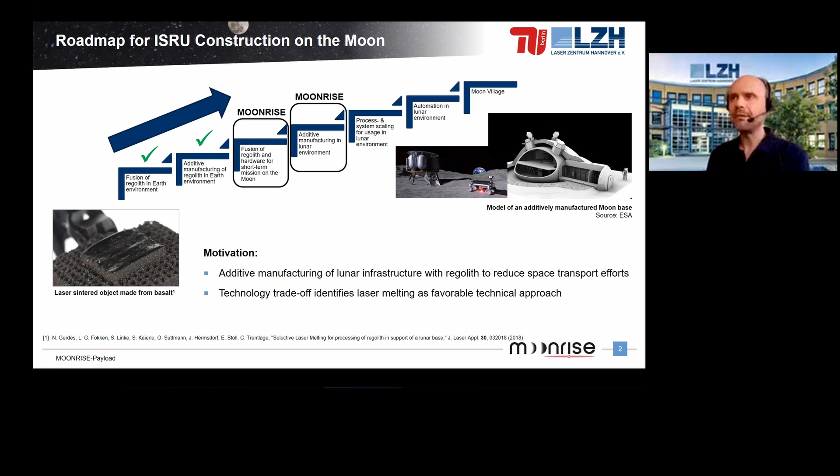We think laser melting is a good approach because it does not need any consumables like additional binders and so on. There's also no need of regolith pre-processing, so you can just use it from the ground. Laser melting is also quite mobile. It's independent from direct sun incidence, and you can achieve a good manufacturing precision with a laser. And what's important is a scalable process. You can use stronger lasers, and also automation is possible.

With our instrument idea, MOONRISE, we want to go for the lunar surface and make a small-scale proof-of-principle experiment to melt regolith with a laser: pearls, which means 0D objects, lines, which means 1D objects, and also areas, which means 2D objects. We want to collect process videos and photos of the fused regoliths on the moon and use this as an input for future process scaling along the roadmap I showed.

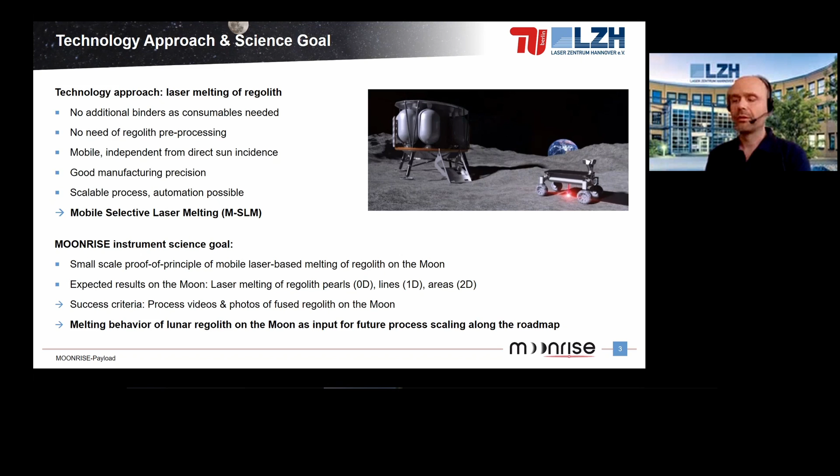So we teamed up, as I said, with the Technical University of Berlin. They have a strong expertise in regolith simulant development and processing. They also have a strong expertise in development of ISRU technologies and system design of robotic systems for construction. And we at LZH have a strong expertise in additive manufacturing. We do laser powder bed fusion, laser deposition welding, but we also use artificial intelligence for process control of additive manufacturing.

We also build laser spaceflight hardware. For example, we built the MoMA laser for the ExoMars mission. We delivered the flight model and the flight spare, and we did all the design in-house, the manufacturing, and the qualification of these lasers.

The Technical University of Berlin developed a regolith simulant system, which means we have Maria-based simulant and Highland simulant, and you can mix them to achieve the local specific mixture for a specific landing site. You can add olivine, ilmenite, and other minerals to chemically adapt the simulant, and also physically adapt the simulant by adding sintered particles and molten glass particles. So we can make the specific mixture according to the landing site.

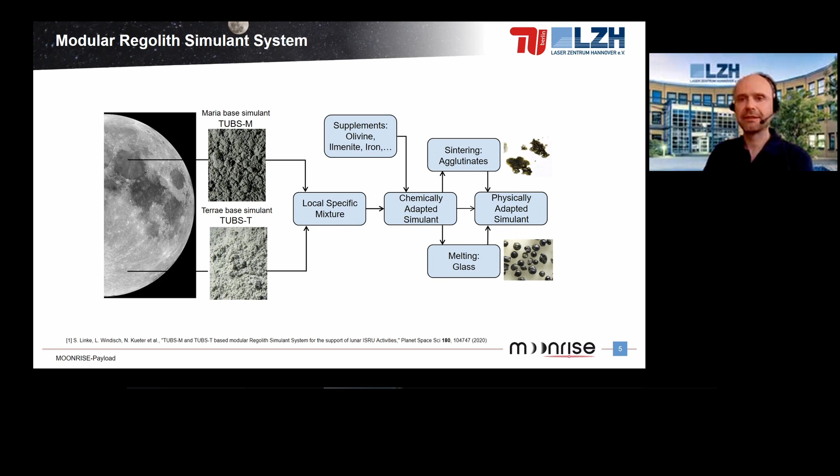The next step was testing the process feasibility of laser melting. We used 9 different simulants, lithic, chemically adapted, and also physically adapted simulants with particle sizes up to 2 millimeters, and we processed them in vacuum with a fixed spot to achieve these 0D pearls, which are seen on the right. The fusion starts in our configuration at 35 watts of optical power at a wavelength of 976 nanometers, and you only need less than 10 seconds to melt the regolith simulant.

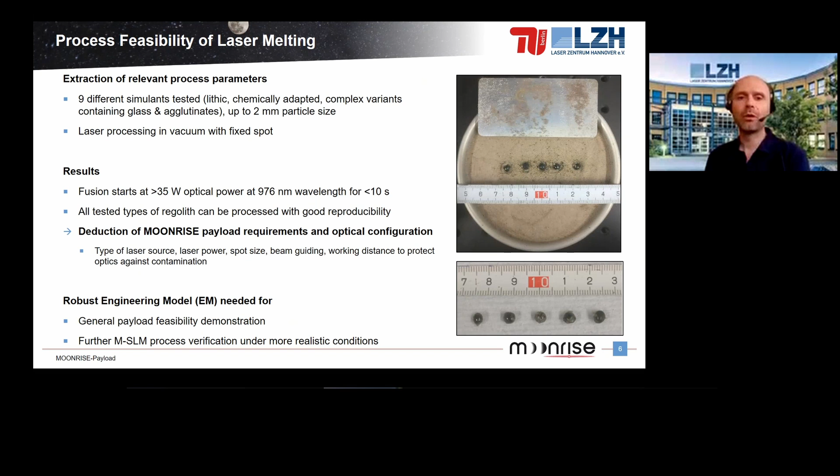All the different types of regolith simulant we had could be processed with good reproducibility with the laser. From this, we deduced the MOONRISE-payload requirements and the optical configuration: the type of laser source, the laser power, the spot size, beam guiding, and working distance to protect the optics against contamination. With this knowledge, we built a robust engineering model, on the one hand to show that such a payload is generally feasible, but also to further investigate this MSLM process under more realistic conditions.

Here you can see the MOONRISE engineering model. It consists of system communication, PCB, laser, including the laser driver, and the optics. Everything is packed in a hermetic housing to protect it from contamination. Typically we go for 70 watts of optical output power. We can go up to 140 watts. And as I said before, for the melting we need about 35 watts, so there should be enough margin.

The power consumption is about twice the optical power, but it's only needed for a few seconds to melt a pearl. The mass budget is 2.7 kilograms for the engineering model, but it could be further reduced for the flight model to below 2 kilograms. The dimensions are 1.5 CubeSat units, and we need a distance to the ground of about 23 centimeters. We already tested this engineering model for temperature and vibration.

We work with a fixed spot, and what we need is some mobility. So we have to mount it on a rover or on a robotic arm to also get 1D or 2D objects. And for the experiment verification, we need external cameras, which are usually available on a robotic arm or on a rover. Here you can see the testing of the model. We did the vibration testing.

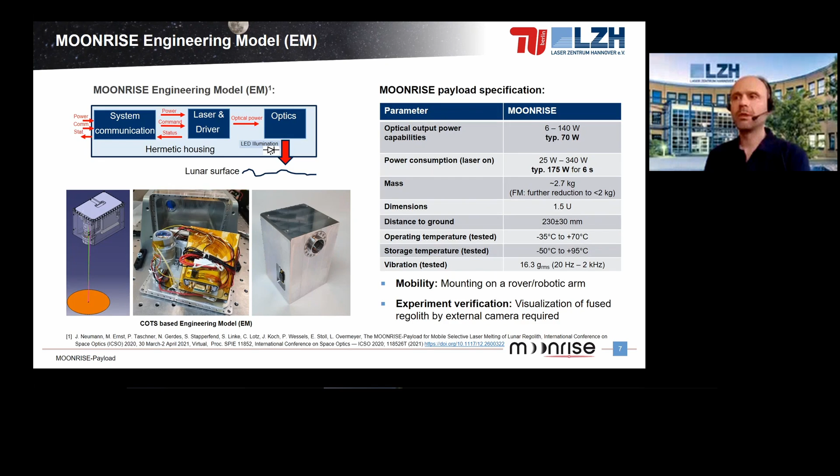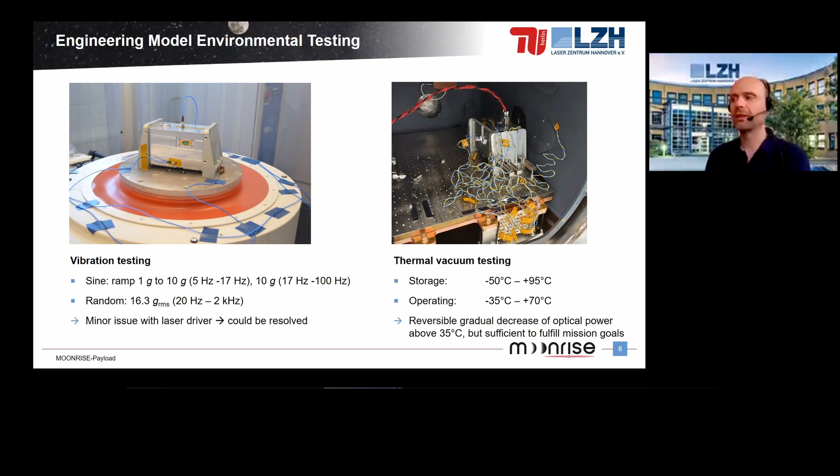There was a minor issue with the laser driver, which could be resolved, and also thermal vacuum testing. There was a reversible gradual decrease of optical power above 35 centigrade, but it was still sufficient to fulfill the mission goal. Then we went further to verify the process under different gravity conditions.

Here in Hanover, we have the so-called Einstein elevator, which is a driven drop tower. With this drop tower, you can also simulate lunar gravitation. We have 4 seconds trial time. We activated the laser for 3 seconds at 105 watts of optical power. We have a little bit shorter time than in the experiments before, therefore we had to go higher with the power, and 1 second to cool down the melt.

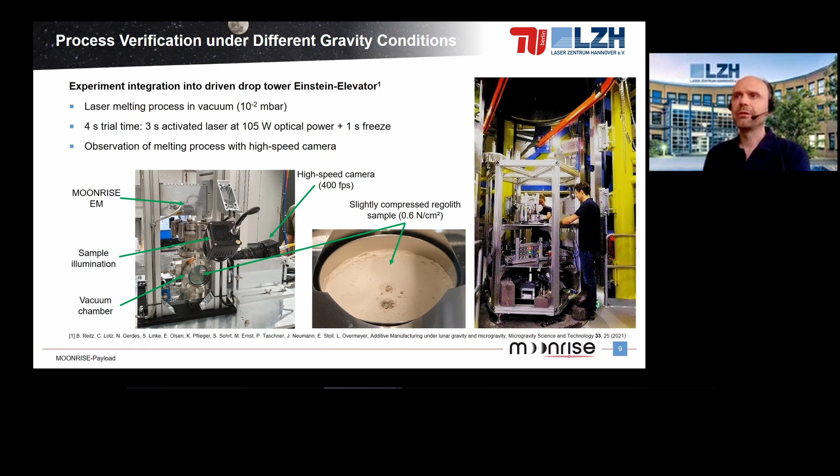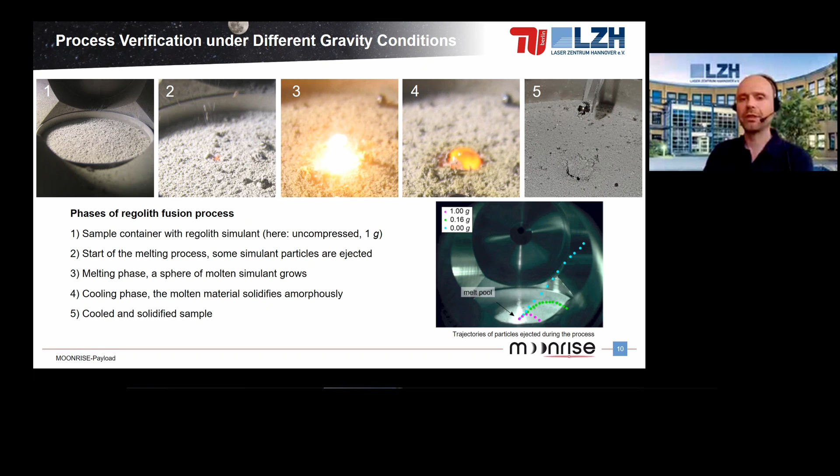Here you can see a comparison between the results under different gravity conditions: 1G, lunar gravitation and microgravitation. We did 15 drop experiments each, and the volume and mass is nearly identical for all gravity levels. You have a smooth surface with some not melted particles on the surface. If you do a microsection or a micro CT, you can see there are bubbles inside. You have about 50% porosity.

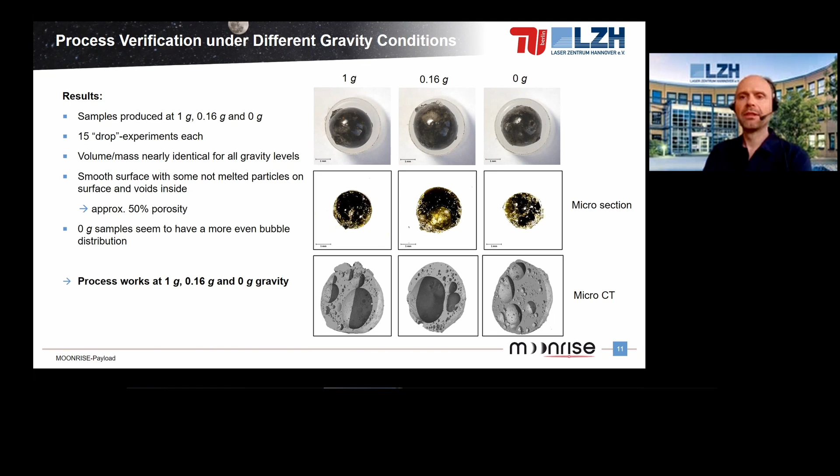If you look at the 0G samples in the micro CT, the bubble distribution seems to be a little bit more even, but the take-home message is that the process works at 1G, lunar gravitation and even at 0 gravitation. The next step was also to make larger objects.

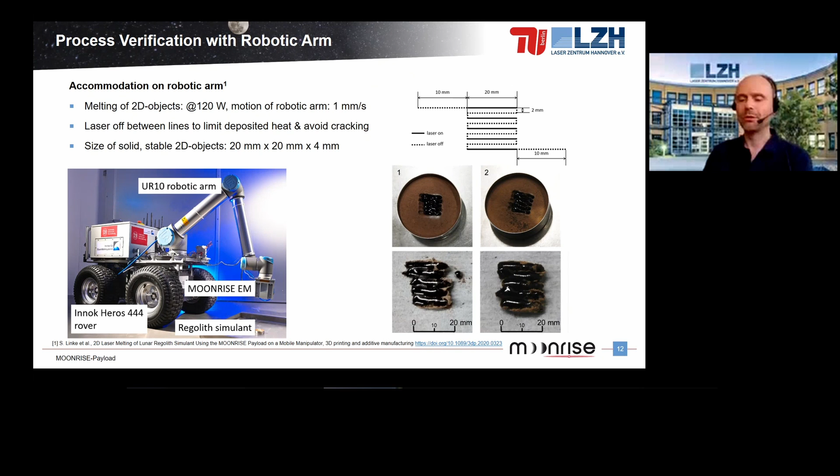Therefore, we accommodated our engineering model on a robotic arm. We had a motion speed of 1 millimeter per second at 120 watts of optical power, and we go line by line. In between, we had to switch off the laser to limit the deposited heat and avoid cracking, but we achieved 20 by 20 by 4 millimeter sized solid objects.

So in summary, I showed you a proof of concept payload for laser-based fusion as part of the roadmap for 3D printing of regolith structures on the moon. We did a feasibility study and also built an environmentally tested engineering model. We verified the fusion process on ground, in vacuum under lunar gravity, and made 0D, 1D, and 2D objects.

In future work, we recently received a new funding period to build an FM and also some money for accommodation on a commercial lander. Of course, we want to extend our ground test campaign and also include artificial intelligence for remote result evaluation. Finally, we want to verify the MSLM process on the moon. Furthermore, we work on implementation of 2D beam deflection, laser power scaling, parallelization, and so on for potential follow-on payloads.

This work was funded by the Volkswagen Stiftung, by DLR, and also by ESA.

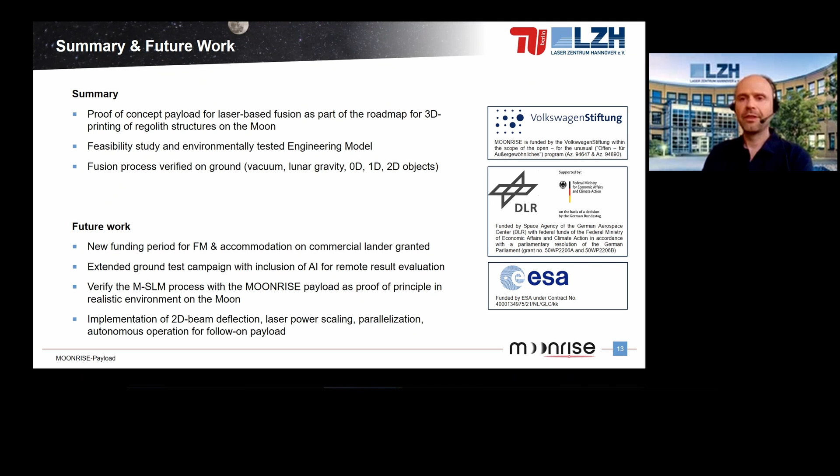Exciting results, thank you. Do you think you can also make 1D, 2D objects in the Einstein Elevator? Is the available time sufficiently long? Yeah, the problem is we have only 4 seconds for one drop, and we need very high laser power to do so. So we have projects to also test the limits of the Einstein elevator. You can go for stronger lasers, then you have a faster speed. That's something which is currently under evaluation.

Okay. There are no other questions, and I might have a quick one. You mentioned that you are now transitioning from EM to FM. Just for curiosity, what are the major development steps? Is your EM already sufficiently representative, or in terms of hardware, what would be the major transition from EM to FM for this hardware?

Of course the housing is very stable, so there we can save a lot of mass, and now we use many commercial off-the-shelf electronics which would be replaced. We already tested this commercial off-the-shelf electronics separately in thermal vacuum chambers and for vibration, and there are some minor points which could be improved.